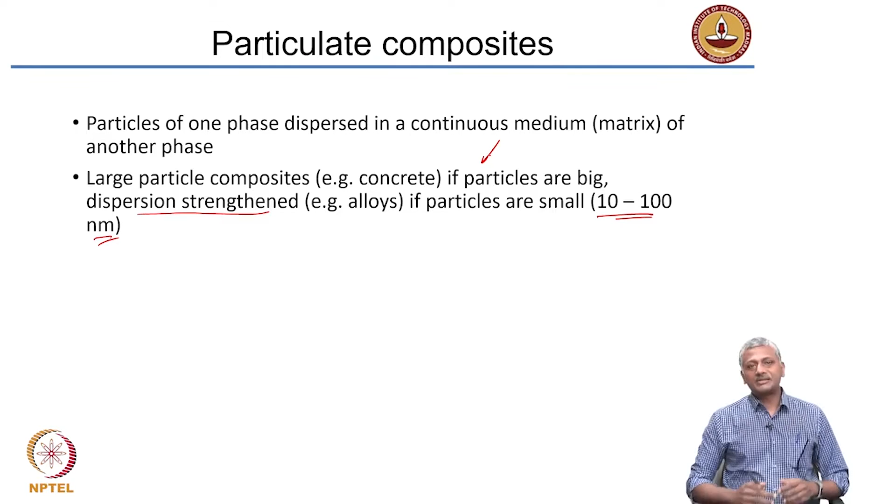Here we are talking about 10 to 100 nanometer size particles. In concrete, if you remember, our particle sizes ranged from 75 microns all the way up to 40 millimeters. So these are fairly large sized particles that are embedded in the matrix.

Again, some examples from the steel microstructure are given here. This is a spheroidite steel. Spheroidite steel has a matrix of ductile ferrite, the alpha phase, something you would have learned previously in your steel lecture. There are particles of cementite, which is Fe3C or iron carbide, embedded in this matrix. When you have a cemented carbide, you have a matrix which is cobalt, which is ductile, and you have particles of tungsten carbide, WC, embedded into this cobalt.

Then you have automobile tires. Please remember, automobile tires are made with vulcanized rubber. So you have a matrix which is rubber, which is compliant or pliable. Rubber is still stiff because of the vulcanization, but you also have particles of carbon inside which make the material a lot stiffer. So carbon black, for instance, very fine particles of carbon, are used as fillers in rubber to increase the stiffness of the material.

So several examples exist from engineering applications. In civil engineering, of course, the most common example is concrete.

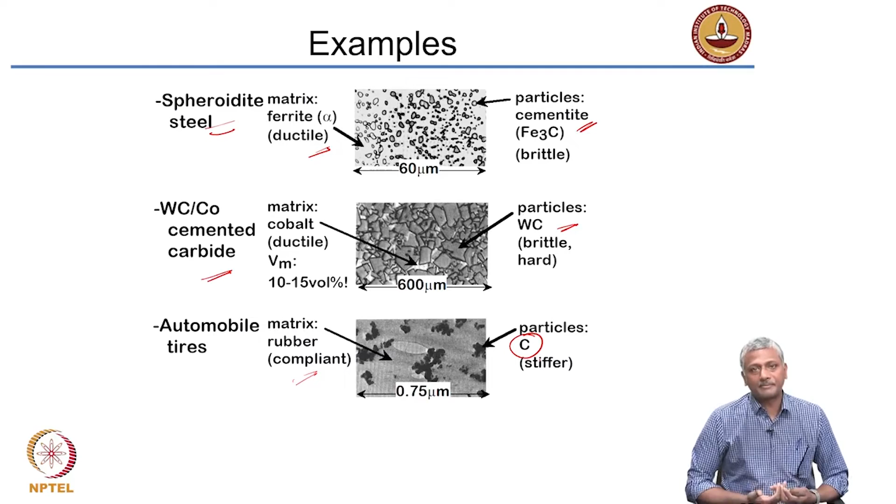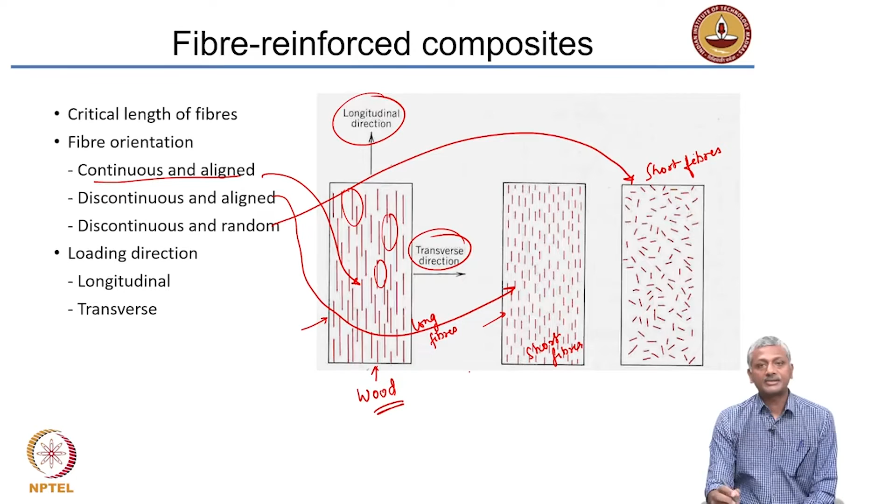Examples of these: this one is very common in wood, where you have continuous aligned fibers. You have short fibers which are randomly oriented in fiber reinforced concrete, for instance. Of course, wood you will learn in another chapter. One example we will see in this chapter itself is FRP, fiber reinforced plastic. We will talk about that a little bit later.

As I said, loading direction can be longitudinal, when you are loading it in the direction of the fiber. In wood, it is extremely important, for example, because when you are loading or pulling the wood in the direction of the fiber, it has got very high strength. In the transverse direction, it will have a lower strength. Not just the strength, even the moisture removal properties will depend on the direction of removal of the moisture. So again, it is a very complicated material, wood. You will learn about that separately in a different chapter.

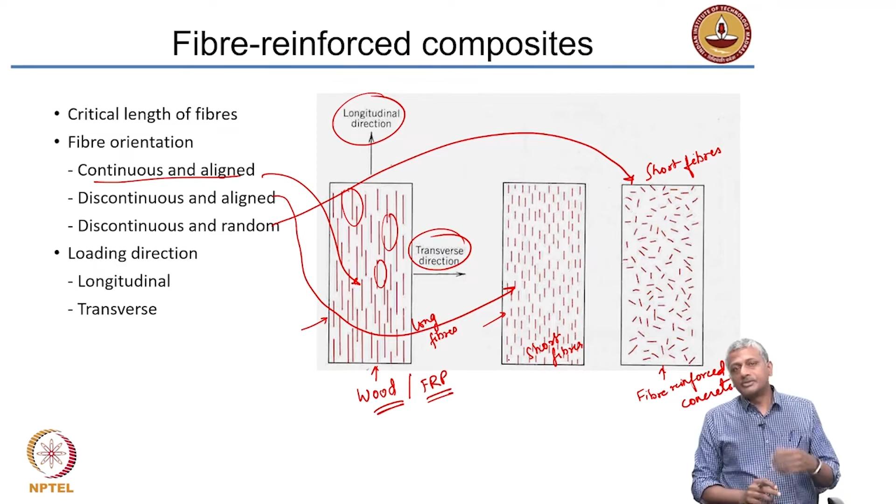Now what are the critical parameters in the case of fiber reinforced composites? What are these fibers doing? Just imagine you have a cut on your face. They put stitches on your face. What do those stitches do? They keep the ruptured skin together so that the skin cells can grow in that gap and then you get a complete coverage of your scar.

So stitches are trying to keep the tissues together and allow for growth of tissues to happen in the region that's been hurt.

Similarly, fibers in a matrix are trying to do something similar: if you have a material that is getting deformed, let's say a material where a crack has happened, you have a fiber sitting inside the crack, bridging the crack, which is preventing the material from getting torn apart.

The fiber is basically preventing the material from getting torn apart. So obviously the longer the fiber, the better it will hold the material together. Generally the fiber length has to be good enough for effective stiffening and strengthening.

So fiber length should be greater than 15 times the fiber strength in tension multiplied by the diameter of the fiber, divided by the shear strength of the fiber matrix interface. Very often we define the length to diameter ratio as the aspect ratio of the fiber.

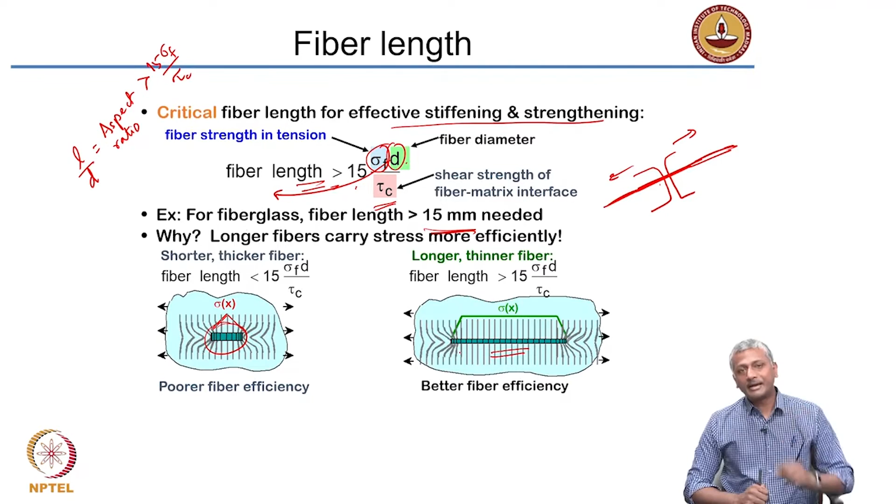Again, you can apply similar rules as you did in particulate composites with respect to calculating the net composite modulus or net composite engineering properties.

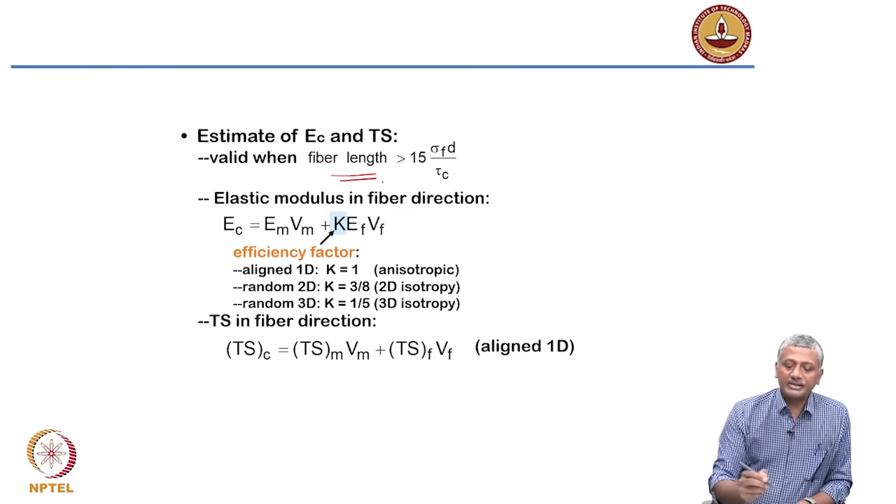For fiber lengths which are high enough, you can actually apply these sorts of equations in the fiber direction, that means in the longitudinal direction of loading.

In this direction, the modulus of elasticity of the composite equals the modulus of elasticity of the matrix times the volume fraction of the matrix, plus the volume fraction of the fiber times the modulus of the fiber times a factor k, and k depends a lot on the orientation.

If you have a perfectly aligned one dimensional case like what is shown here, you will have k equal to 1. If you have continuous aligned fibers, you will get k equal to 1. If you have random fibers in 2 dimensions, the k value reduces to 3 by 8. And if you have random orientation in 3 dimensions, for instance fiber reinforced concrete, the k value is only 1 by 5.

That means the contribution of the fiber in the composite reduces with more and more random orientation. If you have good alignment, the contribution of the fiber is very high, but if you have poor alignment, the contribution of the fiber reduces significantly.

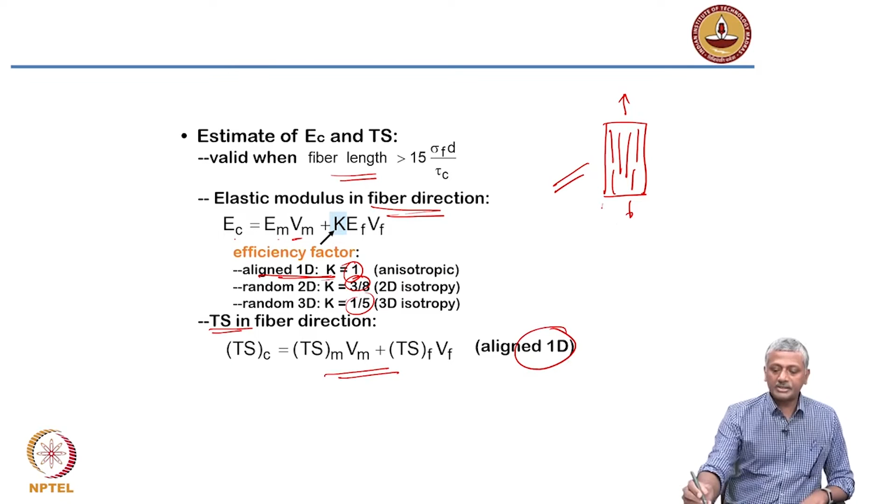In the fiber direction, the tensile strength can also be calculated in a similar way for an aligned one dimensional, continuous aligned case: tensile strength equals matrix strength times volume fraction of matrix plus fiber strength times volume fraction of fiber, only for the aligned one dimensional case. This is the same rule of mixtures applied again.

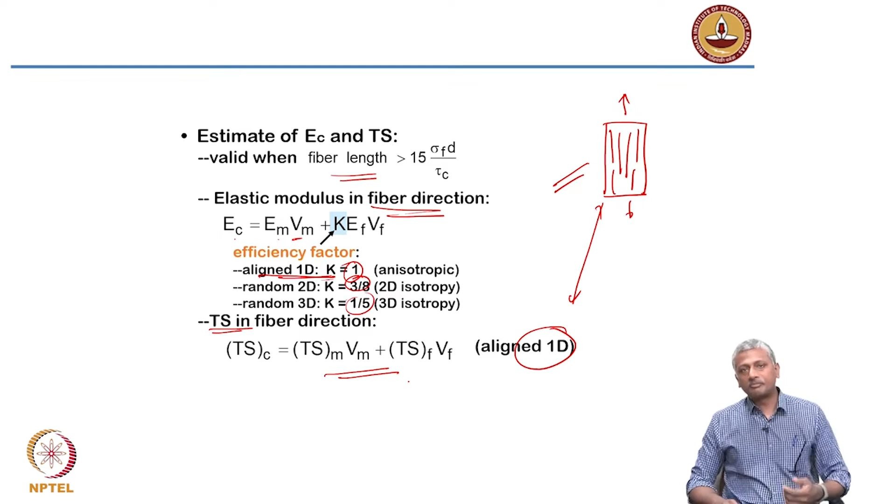Now let us take a look at specific construction applications of this composite called fiber reinforced plastic. As I said earlier, fiber reinforced plastic is when fibers are embedded in a plastic or polymer matrix. Now why would you want to use fiber reinforced plastic in construction, where we commonly use steel?

The idea is that steel has a life that is restricted because of its corrosion. Steel will corrode eventually, and to have a structure that lasts long, you need to prevent steel corrosion. So the main problem with conventional steel is obviously corrosion. You can replace this with materials that are corrosion resistant, since you spend a lot of money trying to repair corrosion. Dr. Pillai may have already talked about that in his lecture on steel.

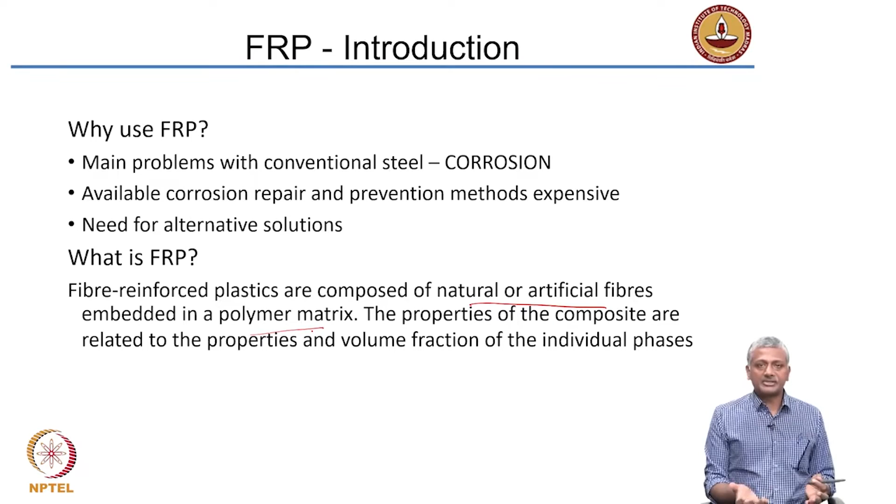There are obviously needs for finding out materials that are corrosion resistant, and which will not degrade with respect to time. Fiber reinforced plastic basically consists of very high tensile strength fibers, natural or artificial, embedded in a polymer matrix. The properties of the composite can be calculated from the properties of the individual phases, just like what we saw previously.

What are the common fiber types used here? You have glass fibers, carbon fibers, and aramid fibers. As you go from glass to carbon to aramid, your costs go up significantly. Glass is cheaper, then you have carbon, and then aramid.

There are several fiber manufacturers or fiber reinforced plastic manufacturers in India, but you will see later when we talk about applications that instead of using it as reinforcing, fiber reinforced plastic is often used for repairing and strengthening concrete structures. I will talk about that in a minute. As I said, carbon fibers and aramid fibers are very expensive, because of which only glass fiber reinforced plastic can provide a cost effective alternative to steel reinforcement for construction purposes.

So here you have fibers of glass embedded in a matrix, a polymer matrix, and these are glass fibers.

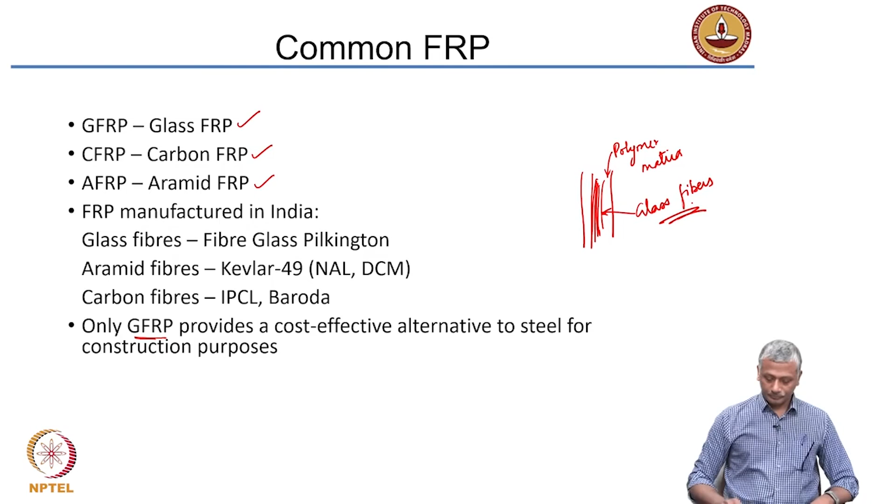The advantage of glass fiber reinforced plastic is that it will have no corrosion, because it will not degrade like steel. I will touch upon that again, because corrosion can have a different meaning when you are talking about polymers. Glass fiber reinforced plastics can be made into very high tensile strength materials. The glass fibers themselves are extremely strong, and the tensile strength of the fibers is generally much higher than that of the composite.

Lightweight - the glass fiber reinforced plastic is much more lightweight as compared to steel. You are talking about densities of GFRP in the range of 2.5 to 2.7. Steel has a density of nearly 8. So for the same size of bar, it is much easier to lift a GFRP bar as compared to a steel bar. You have a very high strength to weight ratio in the case of GFRP.

The problems with GFRP are its brittle nature. It experiences brittle fracture, brittle behavior as compared to steel. It has even got lower stiffness, only about 25% of steel. That means even at low load levels there will be a lot of deflection - this is elastic deflection, mind you. If you remove the load, it should spring back, because the material does not have much plasticity. It does not exhibit yielding. So it has a brittle failure.

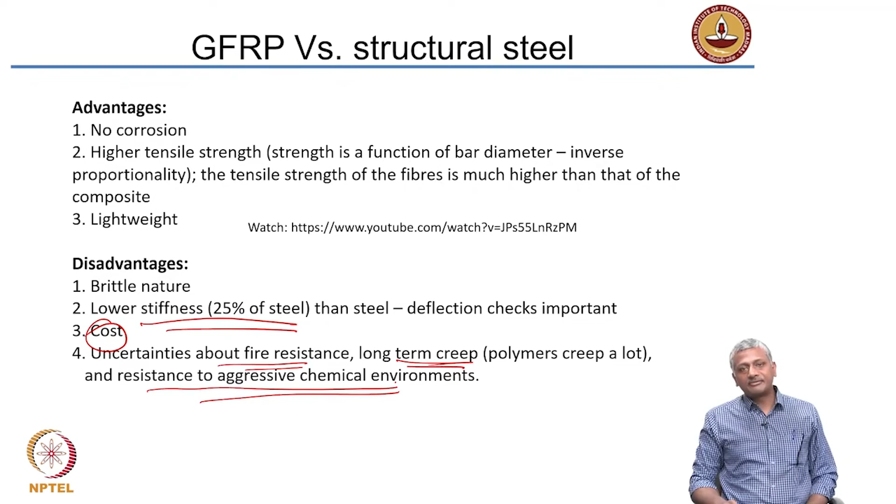Stiffness, which is the slope of the stress strain graph, is also lower than that of steel. Steel has a high stiffness, whereas glass fiber reinforced plastic has a low stiffness. When you go to carbon fibers, stiffness increases, closer to that of steel, but the problem is its extremely brittle behavior with simply no plastic deformation before failure.

In construction we always want to design structures to have a ductile and slow failure. When you compromise on ductility, it is not really an acceptable civil engineering solution. This is something you need to worry about when using alternative materials.

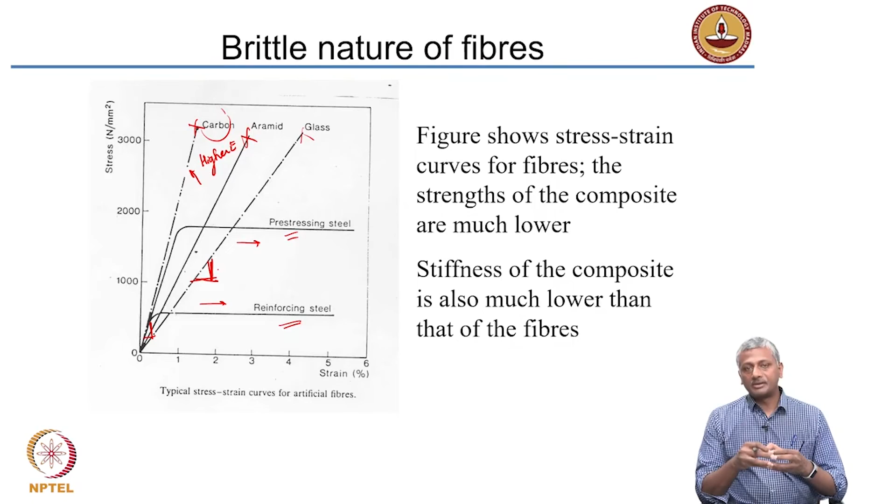Given that its use as reinforcement could be highly limited, there are other applications for fiber reinforced plastic. One common application is the pre-stressing of bridges, but more commonly you have retrofitting with laminates of fiber reinforced plastic. A laminate basically means several sheets of fiber embedded in plastic, aligned in different directions, giving you a composite which is much stronger.

What they do is take these laminates and wrap them around the concrete. Suppose you get a fracture - what do they do? They wrap it with a plaster. Plaster ensures you can't move your hand, it becomes very stiff, so you can't move that joint which has fractured until it heals. In the case of concrete, if there is a lot of cracking, you put this wrapping around it, which will strengthen the concrete within the wrapping area.

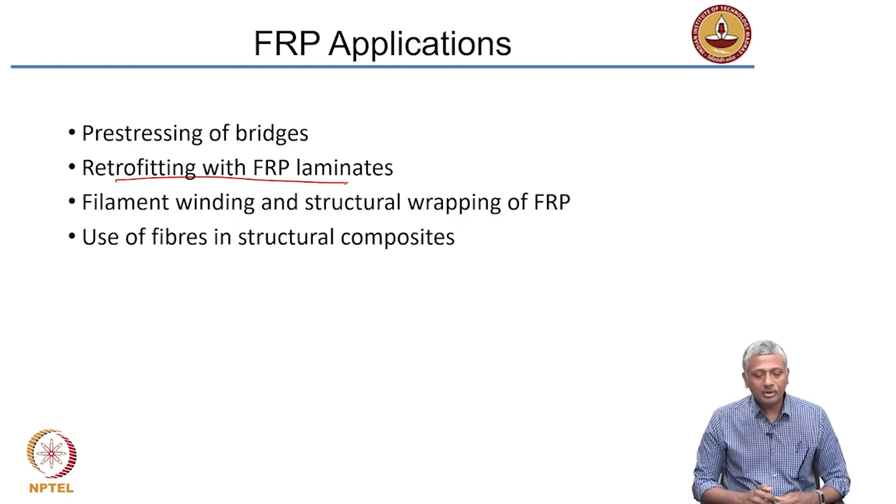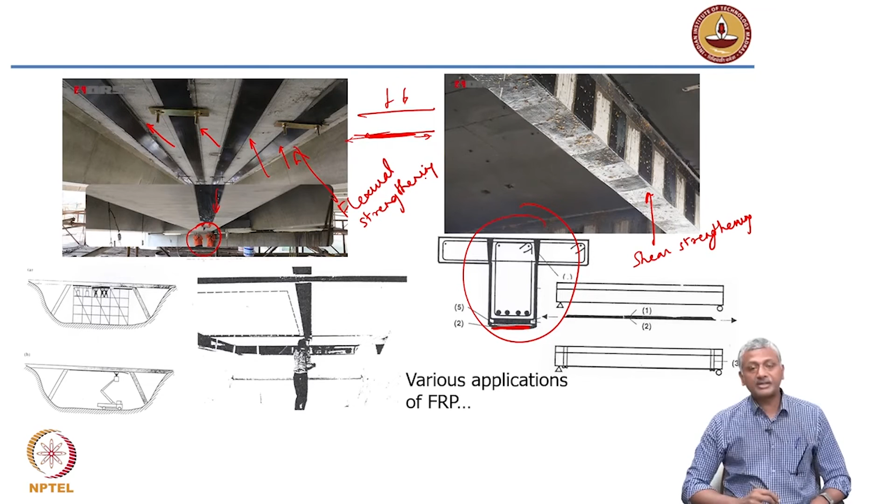There are various ways to do this. The same thing could be done with a steel plate stuck to the bottom of the concrete, but steel will corrode, even a plate will corrode. Secondly, steel is very heavy, so workmen trying to put the steel plate at the bottom of the beam would require significant effort. For affixing steel laminates, you need a full scaffolding and many workers. With FRP laminate, a continuous application can be executed by just one worker, without needing any heavy scaffolding.

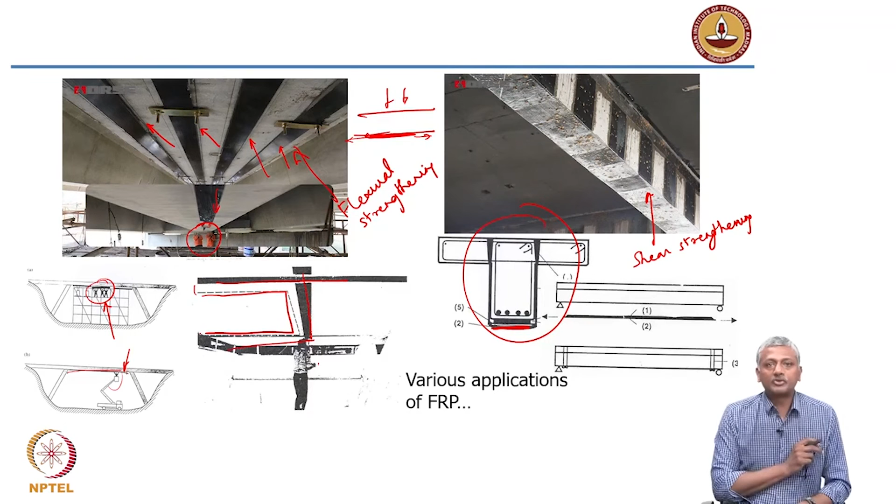These are applications commonly done with fiber reinforced plastics. This is an example where strips are added so that an opening can be cut out from the slab - for example, to create a new staircase inside a building, without having a beam to support the floor weight once the slab is removed. You put the laminate in a square arrangement and then remove the slab from within that, so that all the load is now taken by the laminate.

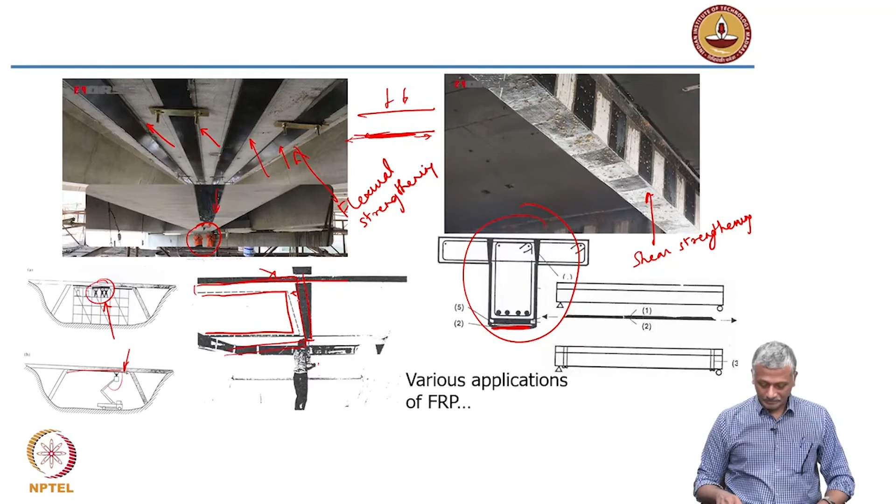So, finally, let us talk briefly about structural composites. We talked about structural composites earlier when we discussed pre-stressing, which is also a form of structural composite. There is also steel tubes filled with concrete, another example of structural composite. Here the materials are not intimately combined, they are still separate, but they form a structure together and function together.

One of the common ones is a laminate, composed of two-dimensional sheets or panels having preferred high strength directions. Here you have fibers oriented in orthogonal directions stuck together with glue. Wherever the grains or fibers are oriented, for example in wood, in that direction it will have very high strength.

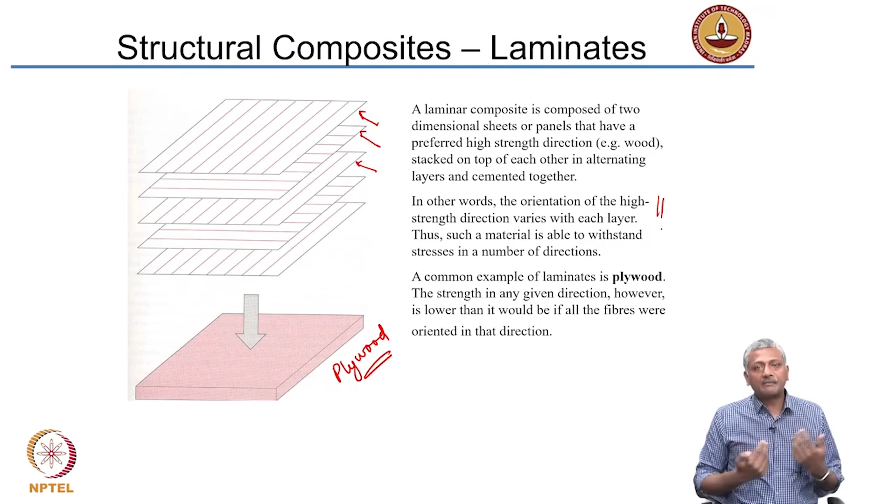When you put randomly different orientations together and stick them together to form plywood, you get a material that is strong in all directions. Plywood is a very common construction material, especially used extensively for formwork. Generally the orientation of the high strength direction varies with each layer, but together the composite has very high strength in all directions.

A composite sandwich panel is formed out of external layers of a stiffer material and internal layers that are lightweight and less stiff. For instance, you have sheets of aluminum on the faces joined with adhesives to an internal honeycombed structure. The honeycombed structure provides very low weight, but because of the bulk provided by the sandwiched material, it has the ability to resist large deformations.

So there are two face sheets surrounding an inner core material of low density. Mostly we use honeycomb material or foamed polymers at the core. The face plates are typically aluminum, but we can also use plywood. These are called structural composites because the materials are combined to work structurally together, not intimately mixed.

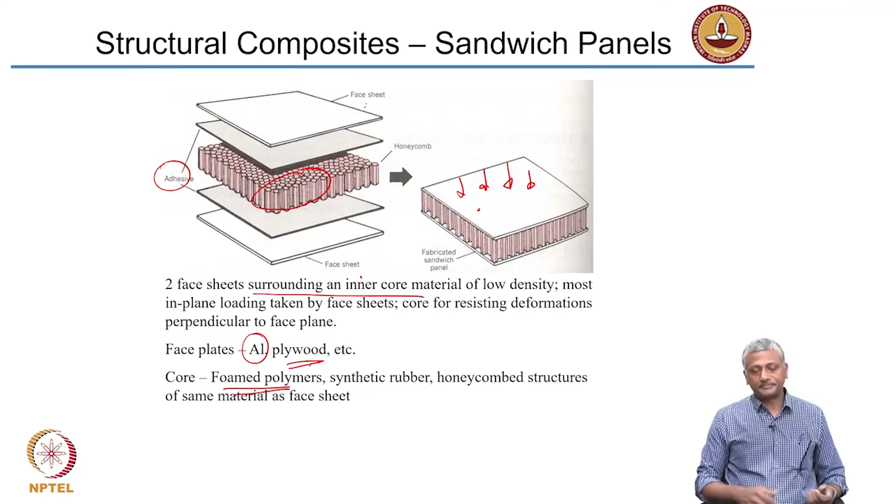To summarize this chapter on polymers and composites, we have specific applications in construction requiring composite materials, and in many instances plastic is the binding phase or matrix phase present in the composite. Efficiency in performance comes from the synergy the different components exhibit when combined. Individually they perform differently, but together there is a synergistic effect that results in the performance of the composite.

When you apply polymers and composites in construction in an outdoor environment, their stability will be governed by their resistance to ultraviolet degradation. They will degrade with respect to ultraviolet conditions, however the rate of degradation will determine the suitability of a particular composite for a given environment. Characterization of polymers is extremely tricky.

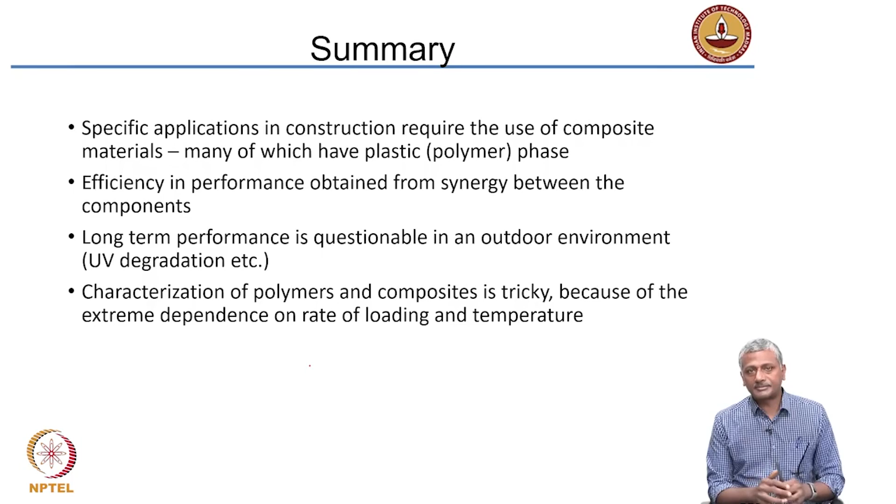You need to be sure you are applying the correct rate of loading and the right temperature for the test. As opposed to concrete, where we also want to test at the right rate of loading, concrete is not as sensitive to the rate of loading as polymers are. With that we complete this chapter.

With that we end this chapter. You will see that much of our discussion on polymers will also be valid when we discuss bituminous pavements in one of the last sections of this course. Thank you very much.